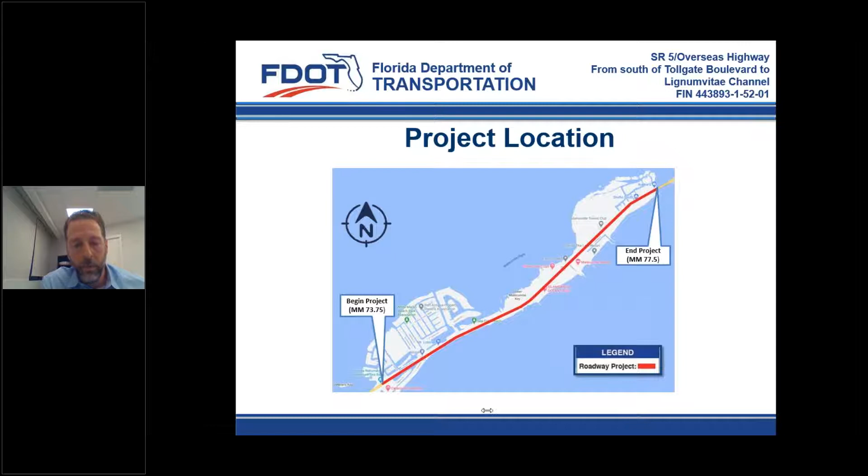Good evening, everyone, and thank you for joining us. As Paulette mentioned, the project limits are from just south of Tollgate Boulevard, which is approximately mile marker 73.75, to mile marker 77.5, just at the Lignumvitae Channel Bridge. Next slide. This is what's categorized as a 3R project, which stands for resurfacing, restoration, and rehabilitation of the corridor. And the purpose of this project is to extend the life of the roadway, as well as to address any safety issues along the corridor. The project lies within the village of Islamorada, within Monroe County.

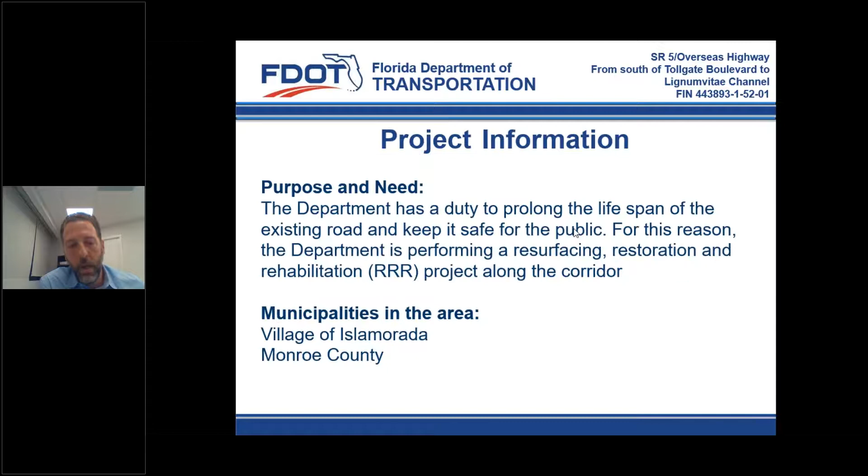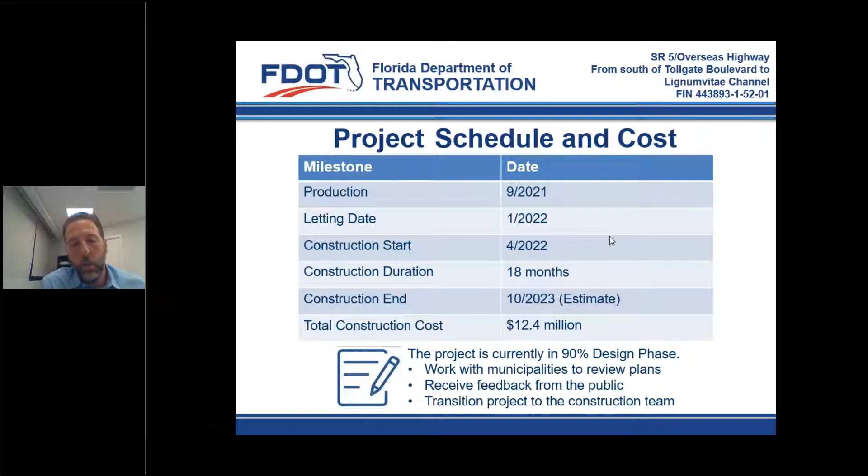Next slide. We are currently in the 90% design phase of the project. We're expected to finish the design in September of 2021 with an anticipated letting date of January 2022. At this time, the construction is estimated to start in April of 2022 or sometime in the spring. And its expected duration is approximately 18 months with an end date of October 2023. And this is estimated as well at this time. Right now, the project cost is approximately $12.4 million. Next slide.

Now, a quick overview of the scope. The intent of this project is to repave and restripe both the travel lanes along the corridor as well as the shoulders. We will also be raising the roadway and shoulders from approximately mile marker 73.9 to approximately mile marker 76 to address sea level rise. We will also be improving the drainage along the segment. I'm sure most of you have seen the ongoing construction adjacent to Sea Oats Beach, which is reconfiguring the revetment system. As a result of raising the roadway, we will also be tying into that new system that's being constructed now. We will also be upgrading the signing and the pavement markings along the segment and upgrading bicycle features along selected locations of the shared use path, specifically the crossing locations. In addition, we will be providing audible and vibratory pavement markings along the edge lines and center lines of the roadway. Next slide.

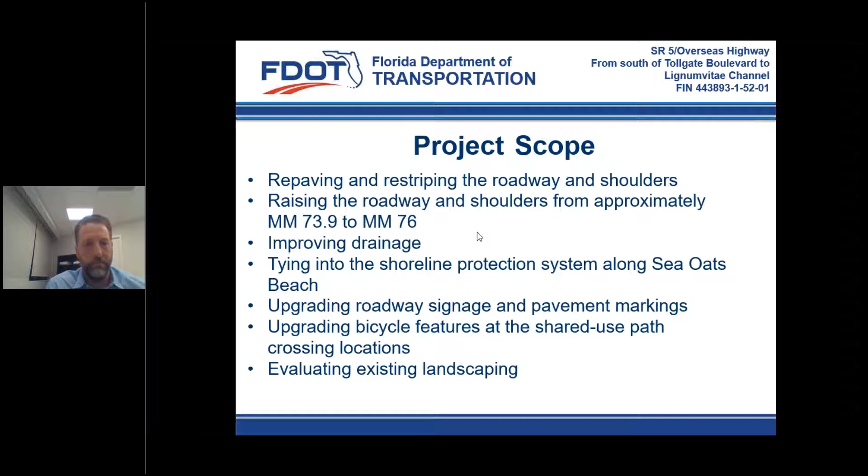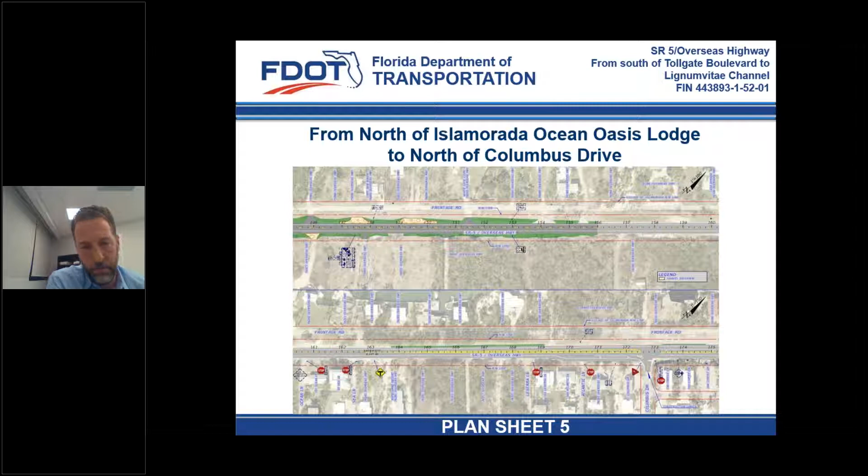And then as you can see here, where the color of the pavement changes to a lighter color, this is essentially the location where we're going to be transitioning down to match existing. And from this point forward, the intent is strictly to mill and resurface the existing pavement, matching the existing elevations. Next slide.

Now, what to expect during construction? The goal here is to maintain the existing travel lanes during construction during the daytime. So we will always have one lane in each direction during daytime. We will need to provide temporary lane closures in order to build the project, specifically as it relates to paving the corridor, but that will be restricted to nighttime work from 9:30 p.m. to 5 a.m., and we will be doing that with flagging operations.

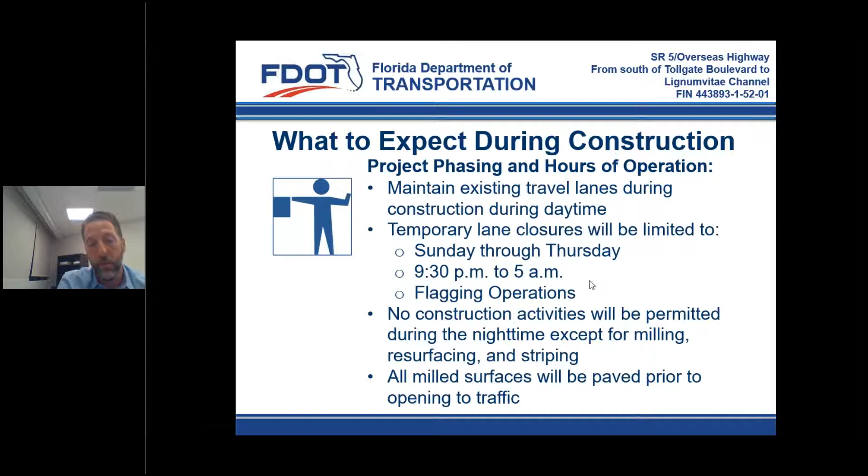That would be the only construction activity permitted at night, in addition to striping of the corridor. And given that this is a high-speed facility, we will also ensure that all milled surfaces are paved prior to opening to traffic the next day. Now, the existing posted speed for the majority of the segment is 55 miles per hour, and that will remain. I do want to point out that at nighttime, given the flagging operations, operating speeds will obviously be reduced.

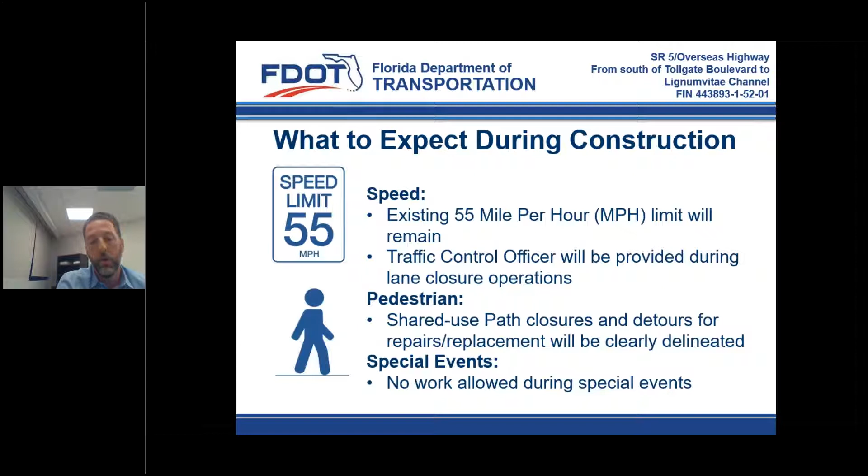As far as pedestrians and cyclists are concerned, any shared use path closures will be provided with temporary detours to ensure connectivity and continuity during construction for pedestrians and cyclists. And we understand how important special events are in the Florida Keys, so we will ensure that no work is allowed during any special events.

Now, dust, noise, and access are obviously things that we need to consider during construction. Our plans will ensure that the contractor is required to water and sweep after each workday in order to minimize any construction-related dust. Noise abatement is also important. That's why we're going to be limiting the work at night to milling and resurfacing only, to try to limit any noise disturbance at night. And as far as access, per standard specifications, business and property access will be maintained at all times during construction.

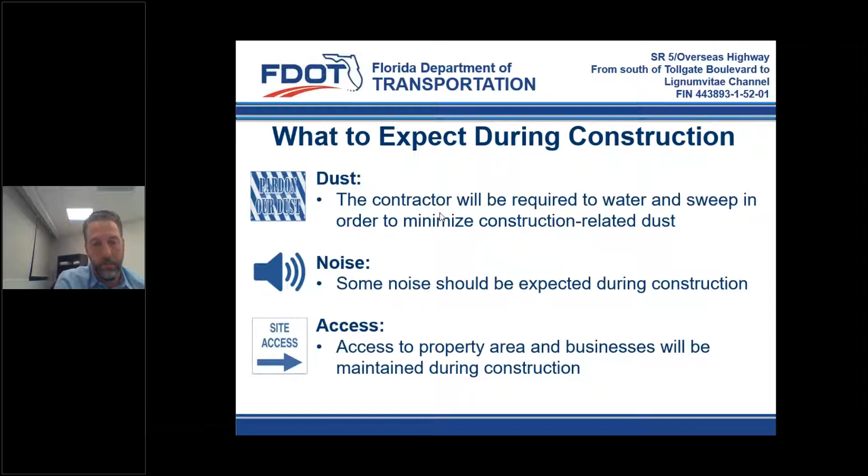And that concludes the presentation, and I will hand it over to Paulette now. Thank you so much, Fabio. Now we've reached the question and answer portion of our presentation tonight. We ask that you please submit your comments in the question box. After addressing comments in the question box, we will open the microphones. If we're unable to answer your question, the project team will provide a written response after the meeting, so no need to worry about that.

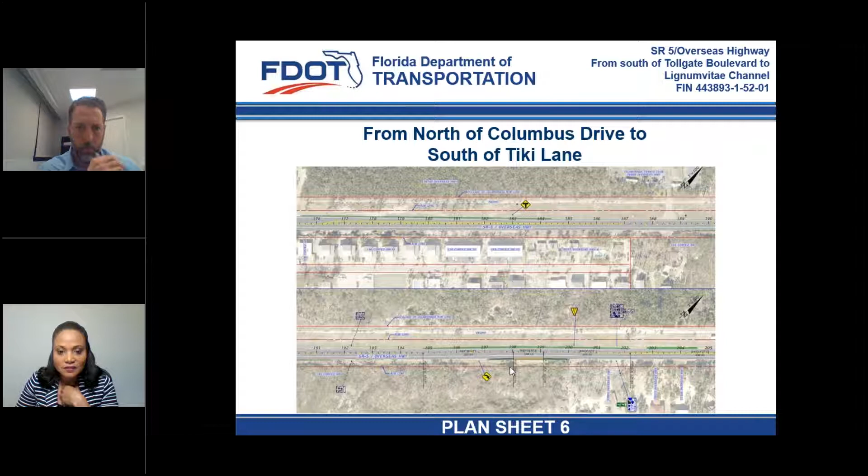Yes, we've had a bit of a dialogue on part of my question. I have a 2-part question. I know you showed a slide on it, but I didn't pick everything up. Can you elaborate on how the drainage is going to work in the area around mile marker 75? And secondly, where you're raising the highway, how is access to the access roads and homes going to work? Because 2 feet is a lot in those spaces. Are you building a ramp or something? You touched on it, but I didn't follow the explanation.

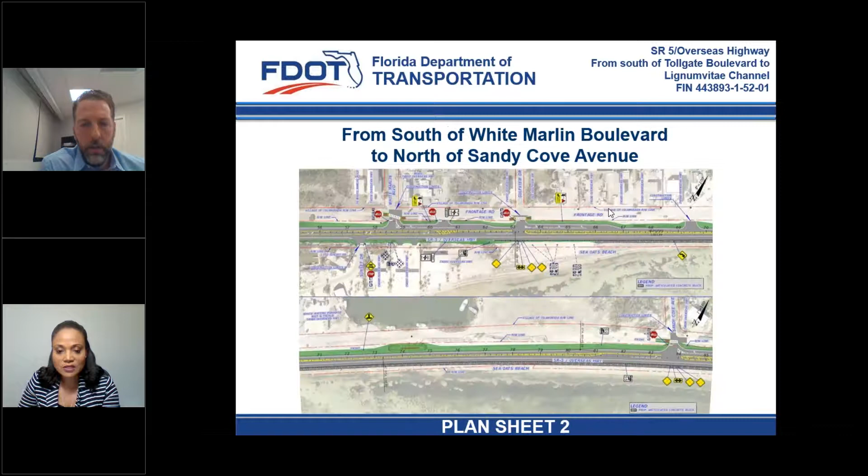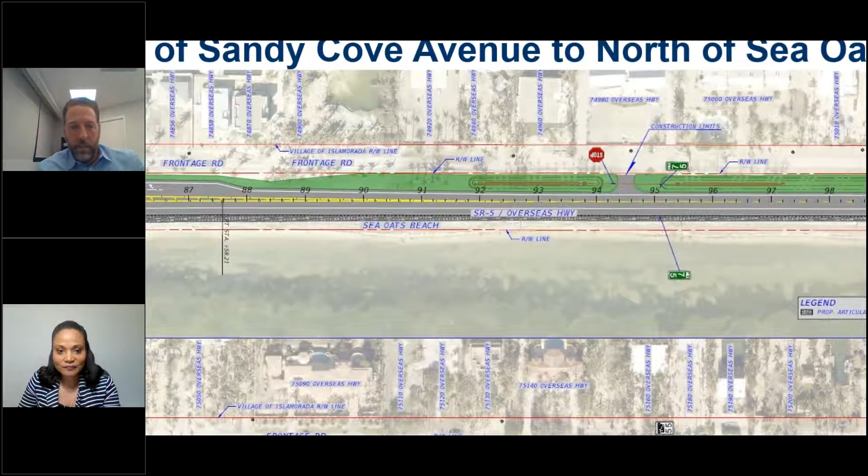Okay, absolutely. I'm going to have Fabio answer that question for you. Paulette, can you take us to that section? Which one of your plan sheets is it, Fabio? Keep going to the next one. No, go back. Back. It's right there. It's actually the bottom pane. Oh, the bottom one. Okay.

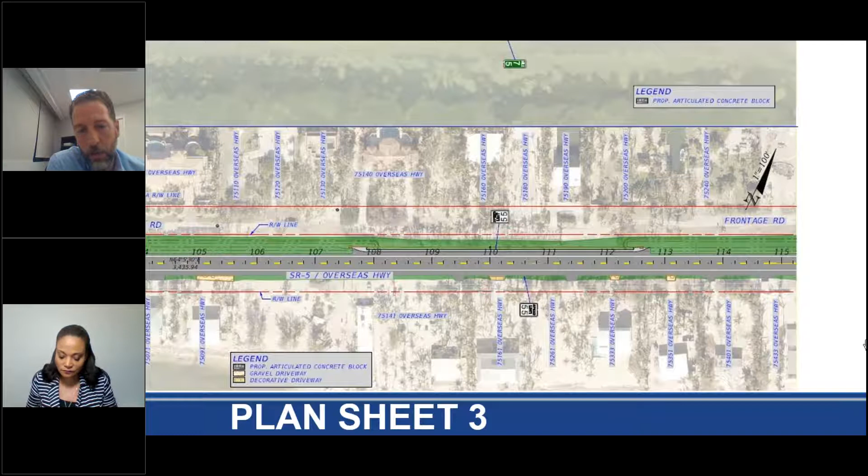Okay, perfect. So in this location specifically, we understand that the frontage road is flooding during king tide. As part of this project, in this specific area, between station 108 and station 113 roughly, we have very limited swale area. So we're providing a shoulder gutter in order to capture all the runoff from the FDOT right-of-way and discharge that into exfiltration trenches within the swale areas.

This is obviously going to improve the current condition, because right now everything is sheet flowing and running off into the frontage road and into that green area. To capture the runoff from the FDOT roadway, we're now collecting it along a gutter in that specific location and sending it to exfiltration trenches. I'm just going to interrupt with one question. Can you explain what an exfiltration trench is? It's basically an underground piping system with rocks, which allows the water to percolate into the existing ground.

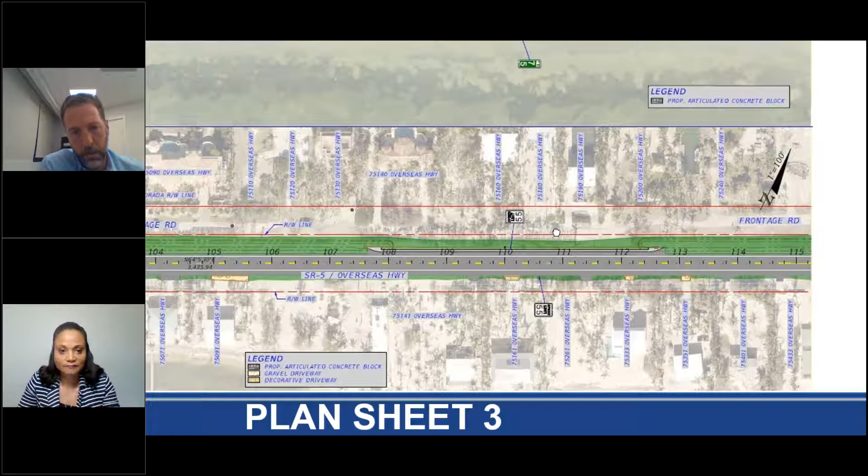Okay, thank you. So there will be some sort of an improvement, but I do want to point out that the flooding experience along the frontage road will still be there after the construction of this project. Okay, thank you. And I will try to follow up with the village on that. I wanted to wait until after I heard your explanation.

And then the second part is, if my memory is correct, the highway is going to be elevated about 2 feet from where it is right now in this area? In this area, we're looking more at about 1.5 feet. And then we're going to be touching down with like 1 to 6 to 1 to 4 roadside slopes, which average about 5 feet from the existing edge of pavement. Okay, so 1 to 6 to 1 to 4 is the ratio of height to length? Correct. Okay, great. Thank you. That explains both things. Thank you very much. You're very welcome.

Okay, thank you so much. I really do appreciate that. Let's see if we can get Mr. Mark Gregg. I believe he has a question. Mr. Gregg? Yes, I also typed in some questions.

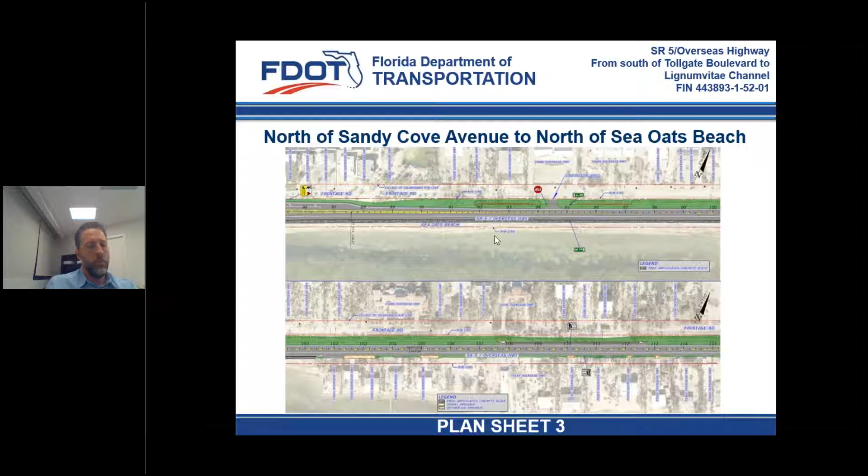I'm very concerned about the turtle nesting area, not only with your proposed project, but with the current project. That is a historic turtle nesting area that was damaged by Hurricane Irma. I'm not sure how much nesting area is left there, but can you share some information or some insight on what can be done to not only protect turtles there, but to hopefully restore the nesting area that may be impacted by your work?

We're currently in the process of going through environmental permitting with South Florida Water Management and U.S. Fish and Wildlife. Based on our initial conversations, one of the things we're looking at, through coordination with the village of Islamorada, is adding a guardrail. We understand that the village is currently utilizing silt fences to try to keep turtles from crossing the road. So by us adding a guardrail, it may provide the village an opportunity in the future to go with a more permanent feature than the current silt fence.

But right now, as I mentioned, the project is under design, and we are currently coordinating with Fish and Wildlife and South Florida Water Management District. What, if anything, is being done to protect turtles from entering the highway for the upcoming nesting season, which is going to begin next month? As far as what's happening next month, I'm not really sure. I know the village in the past has been providing silt fences. I'm not sure if that's what they're going to be doing now or not. Unfortunately, I don't have more information on that.

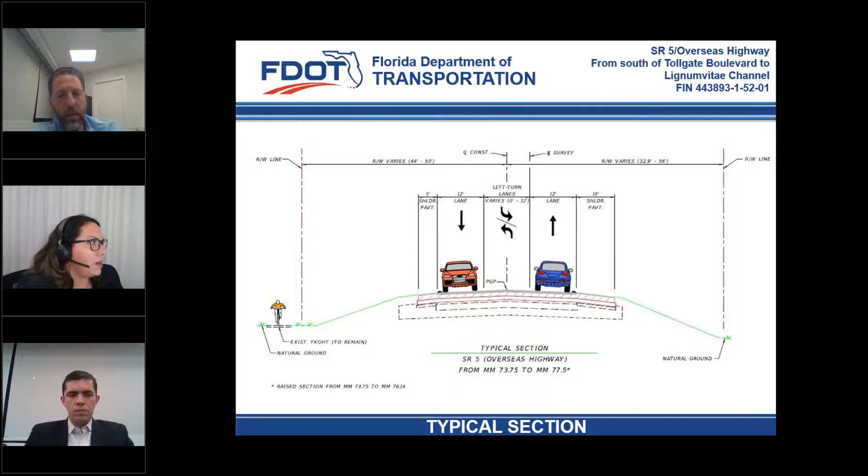Next. No, there. Yeah.

Like Fabio said, what's shown here in brown is what's being built by the current project, which does go below the current mean high water line. But our proposed project is basically going to be tying into that. So the upcoming project that will raise the road is going to have less impacts on that seawall beach side, because most of the big excavation for the toe is going to be built by the time we come in, and we're tying in at the top of the berm. So it's a little bit different.

The design that you show doesn't really, from my perspective, allow much space for a turtle to crawl out and lay eggs. In fact, it pretty much prevents that, and so do the open cell concrete tiles or blocks that you're putting there. In other words, before Irma, there was plenty of room for turtles to lay eggs there, and sometimes they even hatched and crawled under the highway. But now it looks like a total barrier. So it appears that we've completely lost the turtle nesting area. What am I missing?

Well, sir, again, I don't want to speak for the ongoing project. But all of this is being coordinated with the U.S. Army Corps of Engineers, with the Marine Sanctuary, with South Florida Water Management District, and the necessary precautions are being put in place. And the permits that have been issued and the permits that will be issued will have conditions with regards to the turtles' protection.

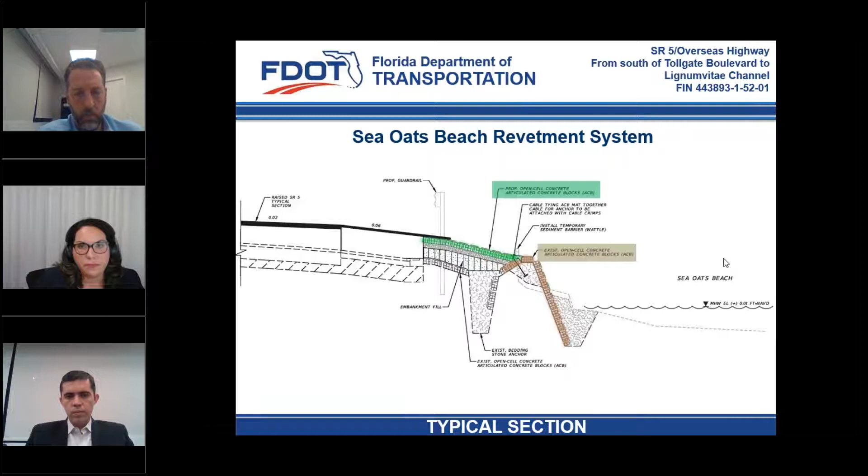You don't have to agree or disagree. I understand. I'm just making a comment. I see you smiling. It's okay. But turtles are very important in the Keys, as they are everywhere. But this project doesn't appear to address that.

Thank you. Yes, sir. Okay. Thank you. Thank you so much for your comment, Mr. Gregg. We really do appreciate it. I would like to make a quick comment. Okay, sure, Umberto, go ahead.

As our team explained, we do not really have knowledge of the current construction project. That was a result of Irma, which affected the road immensely there. So the funding for Irma came and had to be used to restore not only that area, but all along the beach, along the ocean side. And so that's why this project is coming before ours. So we don't really have any involvement in that restoration project. We will find out. They went through all the necessary permits to build this protection.

But also, I just want to bring to the table that there is another plan and another project for the U.S. Corps of Engineers to do beach restoration there, because basically the truth is that the beach there has eroded, basically disappeared. Not only because of what DOT is building now to protect the shore and the road, but also because the beach has been eroding and there is basically no beach there now.

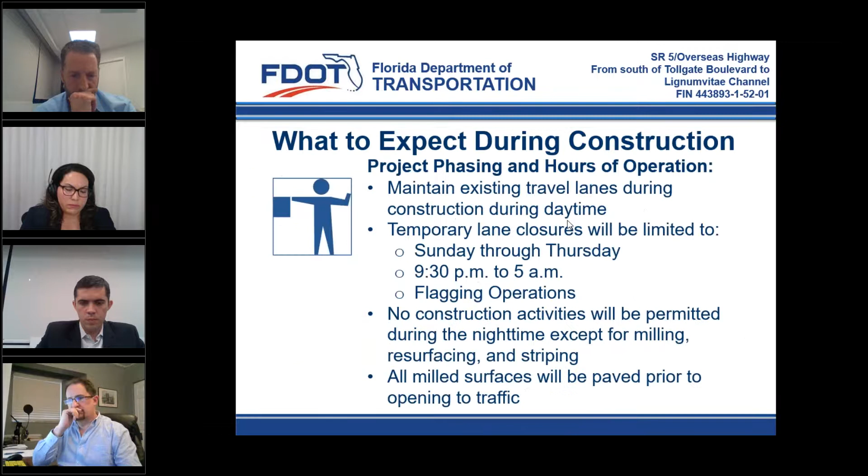We also have a concern. We're homeowners on mile marker 74.5 Bayside. And at the moment, all of the storm water from US 1 is sheet flowing into the access road that's owned by the village.

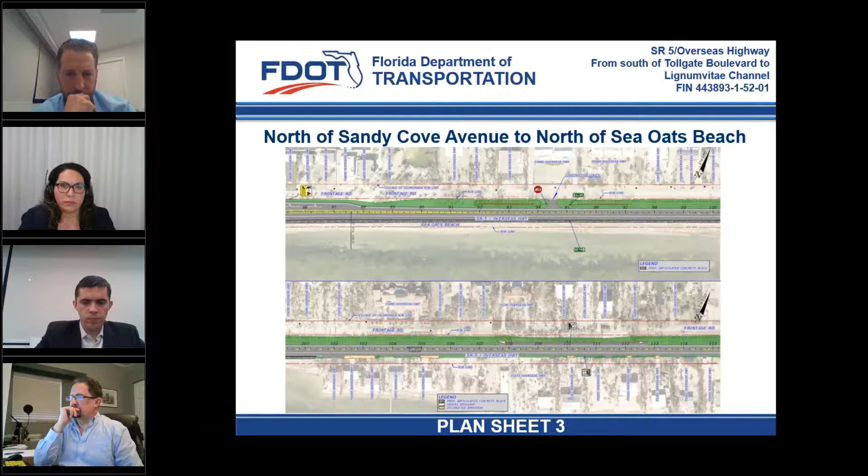And it's creating an unsafe condition in various parts of the access road that's pretty significantly impacting the enjoyment of our property. And I'd like to know if this project is going to mitigate that condition and effectively provide for storm drainage and storm waters that sheet flow off of US 1.

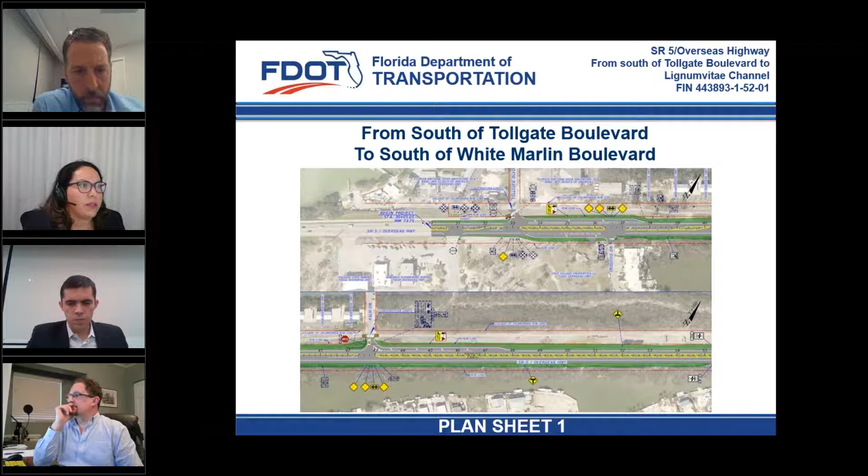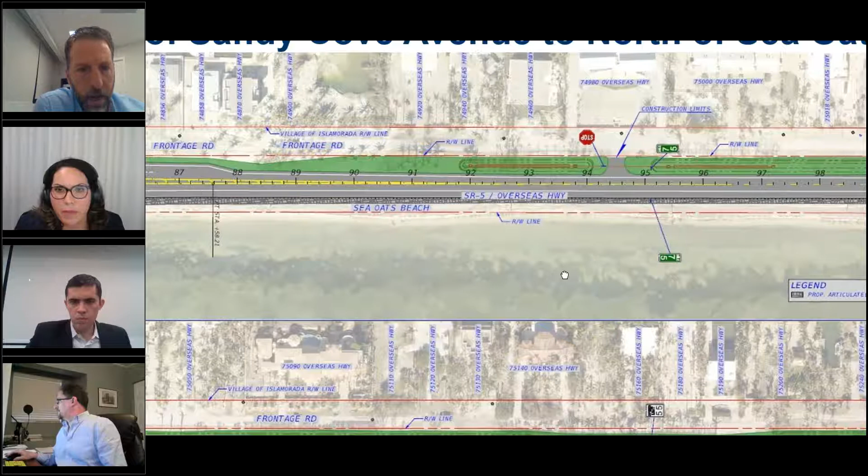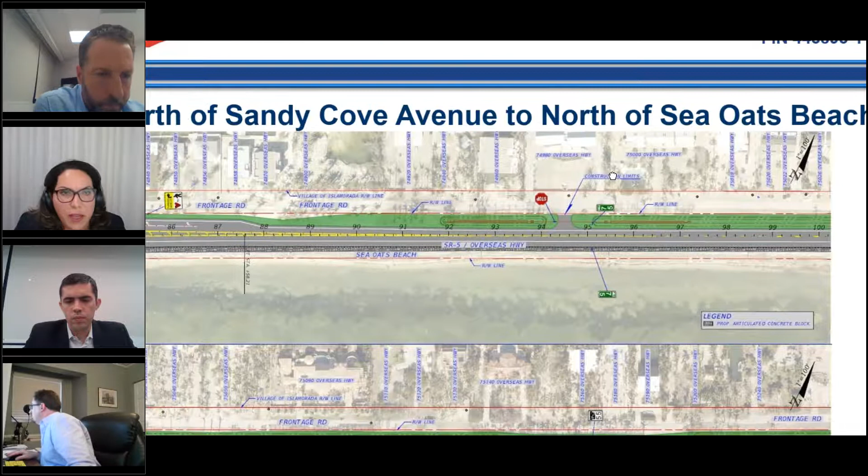Aline, you want to take that one? Yeah, I believe 74.5 is just south of that area we were talking about before. Paulette, can you go to sheet number 3? Is this about the area, the bottom pane? Oh, actually, no, you were at the top. I'm sorry. I think 74.5 is around here. Okay. So in this area, sir.

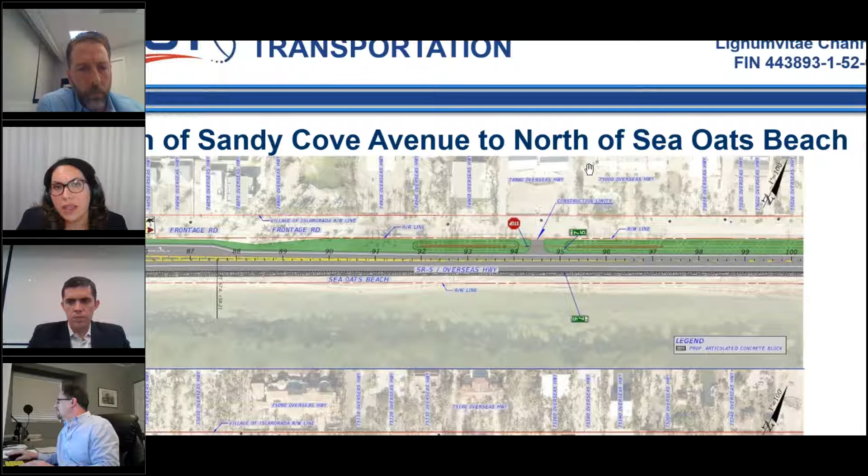So in this area, as you mentioned, the current runoff just sheet flows off of the highway and into a very shallow shared swale with the frontage road, which is within the village's right of way. So what we're doing to mitigate the issue is we're adding swales. I don't know if you see there within the green area, there are contours. We're adding swales that are gonna collect the runoff off of the roadway and attenuate the runoff from the roadway in the swales.

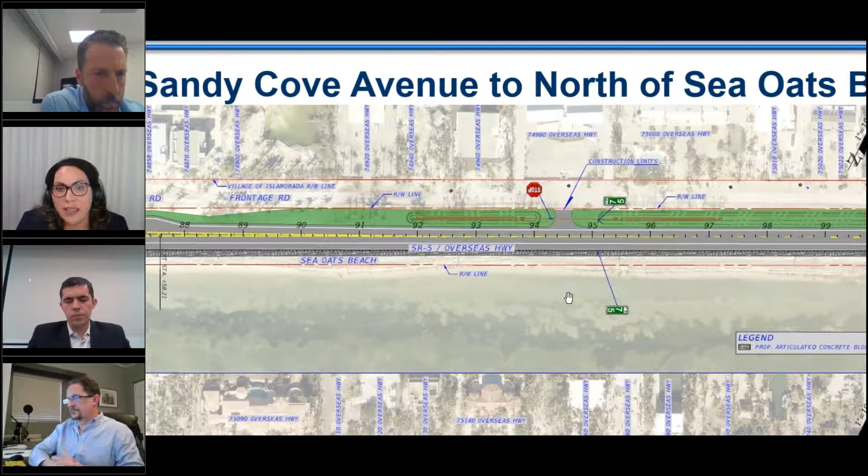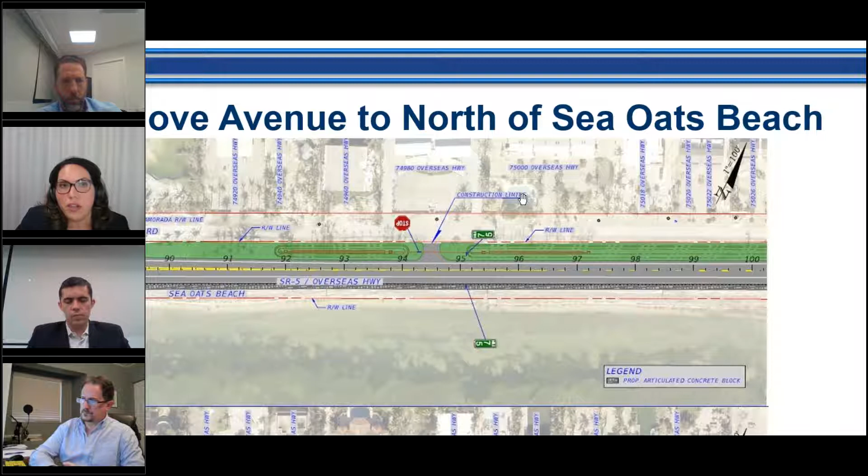And then the swales are gonna have French drains, which is basically just a trench in the ground with a coarse aggregate material and perforated pipe that allows seepage of that water into the ground, so that the runoff is not going into the frontage road right of way property. So this is gonna eliminate the DOT State Road 5 runoff from going into the frontage road.

But I do want to point out that in this area, the frontage road is very, very low. So during times of king tide or wet season, because the water table is increasing and is affected by the increase in sea levels, you may see standing water that is not necessarily from runoff, but is what we call sunny day flooding, which is water that could be coming out of the ground. Understood.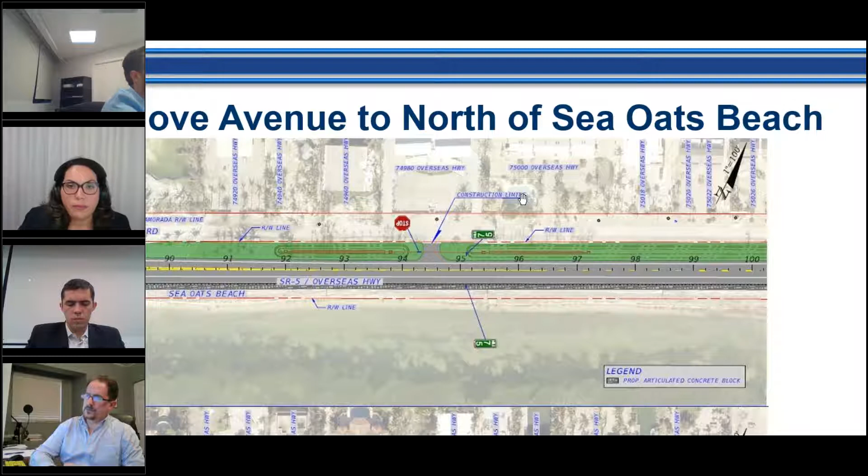Thank you so much, Eileen. Thank you very much. You're most welcome.

Let's see if we have any other questions at this time. Mr. Moser, you have your hand up again. He may not be able to speak, so I'm going to go ahead. Team, we had that question for Mr. Moser having to do with the signage. He does have another question. Evaluating existing landscaping: is any landscaping possible, please, between Sea Oats Beach across from the gas station and the beginning of the Calusa Cove, specifically near Sunset Drive and Iroquois Drive? Thank you.

Yes, unfortunately, since this is a resurfacing project, landscaping cannot be incorporated as part of this project. That's something that would have to be done in the future as part of another project. While we are evaluating landscaping from a safety standpoint to ensure that there's no trees within lateral offset, any new plantings we will not be implementing as part of this project.

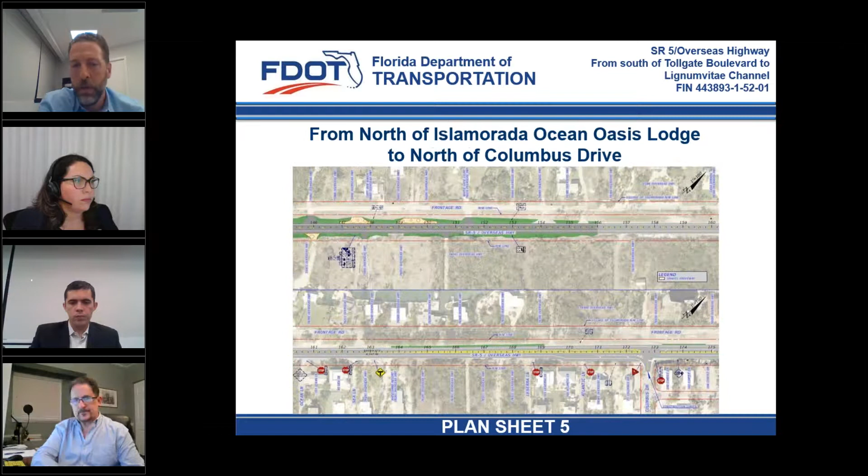Okay, the raising of the roadway is going to stop at approximately mile marker 76. So the area near Robbie's, which is approximately mile marker 77, 77.5, we will not be raising the roadway in that section. The raising of the roadway will stop at mile marker 76, approximately. We will be improving the frontage road at Robbie's. We're going to be widening to improve access to that frontage road, specifically the right turn access from State Road 5 into the access road to Robbie's. So we will be doing that work, but we're going to be matching existing elevations along that segment.

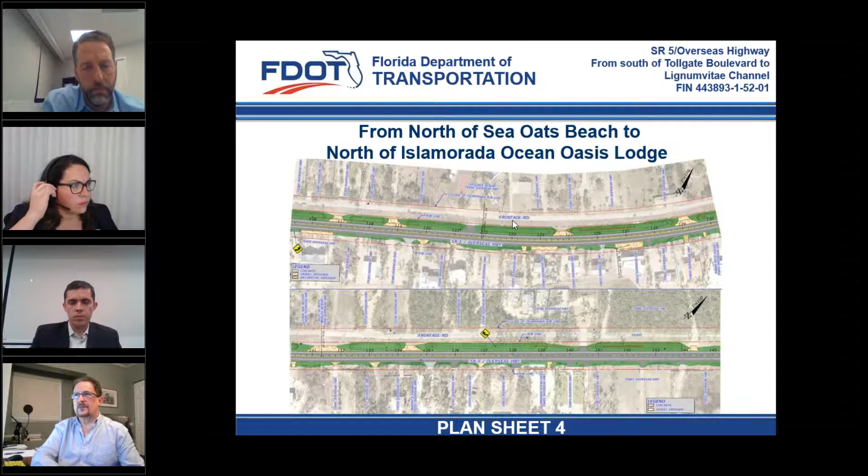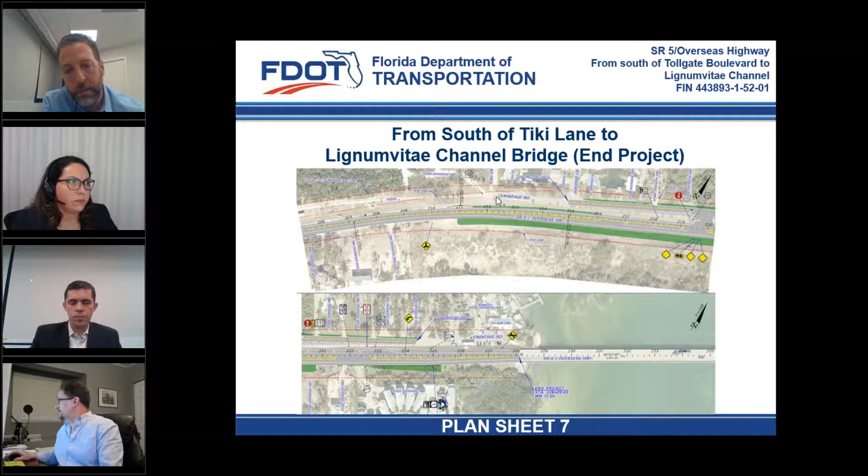Thank you, Fabio. Keep going to the last plan sheet. Keep going, okay. This one? Yes, correct. Okay, all right. So there we will be matching the existing elevation. So we will strictly be limited to milling and resurfacing there and the access improvements to the frontage road.

Okay, thank you, Fabio. Mr. Joe Roth has a question. He says, will the project necessitate moving utilities? We would definitely require adjustments to utilities as a result of raising the roadway. So any existing manholes, valves along the segment will have to be adjusted to meet the proposed grade elevations in the future. As far as relocation of utilities, at this time, we don't anticipate any.

We do understand that Florida Keys Electric is in the process of potentially relocating their utility poles along Sea Oats Beach to the west side of the corridor. But that's a project that currently has not been funded, last we spoke with FKEC, but it's something that is potentially in the works. It will not be part of this project, but there is a potential for relocation of those utility poles in the future. But as far as this project is concerned, it's going to be limited to utility adjustments of manholes, valves, etc.

Thank you, Fabio. Paulette, yes. I don't know if it was Mr. Roth that had the question that you read regarding the base flood elevation. I just wanted to elaborate on that. What I had answered before with regards to the raising of the road is to combat against sea level rise, which is just the everyday expected tidal fluctuation in sea level. With regards to base flood elevation, that's typically for the 100-year flood events for FEMA. And I don't know if the gentleman was referring to that.

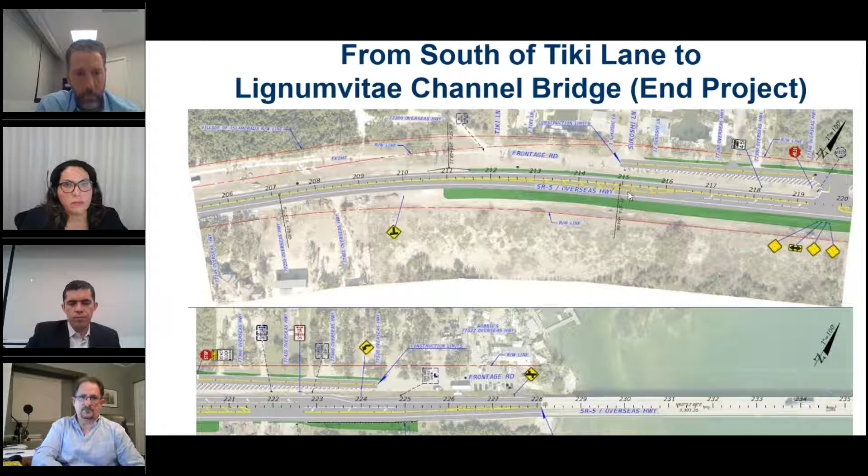Yeah, you did answer part of the question. I just want to thank Mr. Gregg and Ms. Williams for their comments about the turtles, number one, because we live at 74.5, and that is a concern from almost all the residents. My specific question was about the walking bicycling path between Robbie's and Sea Oats Beach, not so much towards Robbie's because that's fairly dry, but another caller mentioned the village access road is a low spot, floods often, and it does not appear to be a rising sea level thing, but whenever it rains, that water will get ankle deep or a little bit deeper, and it will go almost to the edge of the highway.

So if you're walking on that path, sometimes for 7 to 10 days after a heavy rainfall, you have to go out and walk on the edge of Highway 5, US 1, and it's an accident waiting to happen, and I don't feel good doing it, but you know, that is my exercise for the day. So I'm wondering if this project isn't an opportunity, even though it's not in the designs now, and I'm not so sure.

I've done a lot of work like this in my career. I'm retired now, but deepening and widening the swales will certainly help, and some French drains will help. But I can guarantee you right now that will not completely, not even come close to addressing the problem. And I'm wondering if there isn't an opportunity for this project to address some of those concerns, even if they have to work with the village to address, because it is their right of way, their roadway, and the walking path.

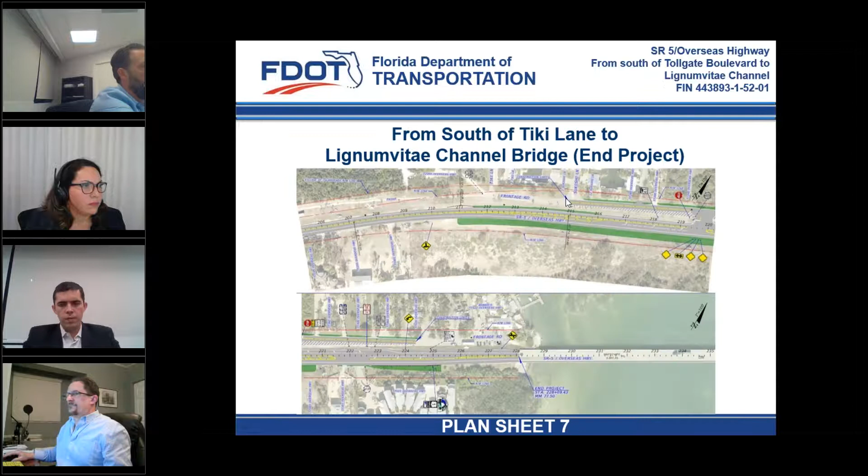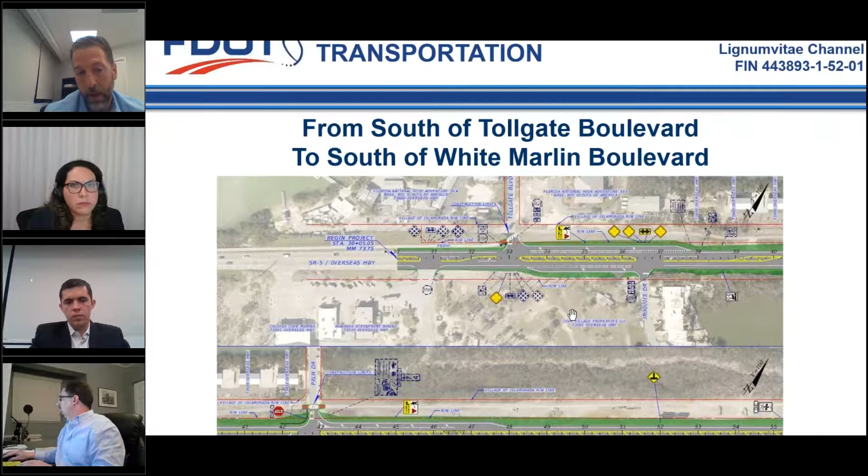Yeah, that location there, as you can see, we have very, very limited room. Right now there are no swales that we're proposing along this segment. We do have minor green areas that we're going to be utilizing to capture the runoff, but we have very limited room within the right-of-way to provide swales. And in some sections, the Florida Keys Overseas Heritage Trail is almost directly adjacent to the shoulder. In that specific area, we're not really raising the roadway. That's where we're essentially transitioning down to tie back to existing, so we're almost replicating what's currently out there.

We can go ahead and further evaluate the drainage at that location to see if there's anything we could do. But as you can see, we have very limited room there based on the existing conditions. The only thing I can tell you is we're trying to match what's out there currently, and we're strictly limiting what we're doing there to milling and resurfacing and transitioning up to the raising of the roadway.

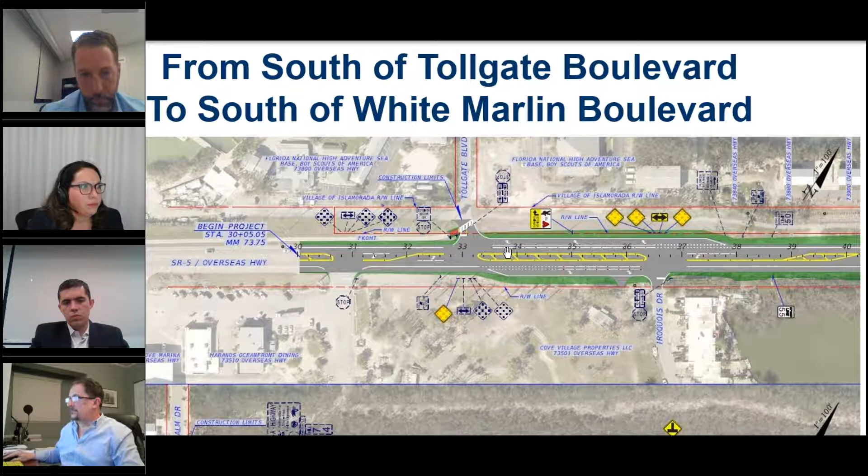Yes, thank you. And when I asked about landscaping in addition to beautification, I was hoping it was something that would suck up all of the additional runoff and help mitigate against the impacts on the wetlands along that canal area, again in sheet 1. But we've gone back and forth on an email with that. So thank you very much.

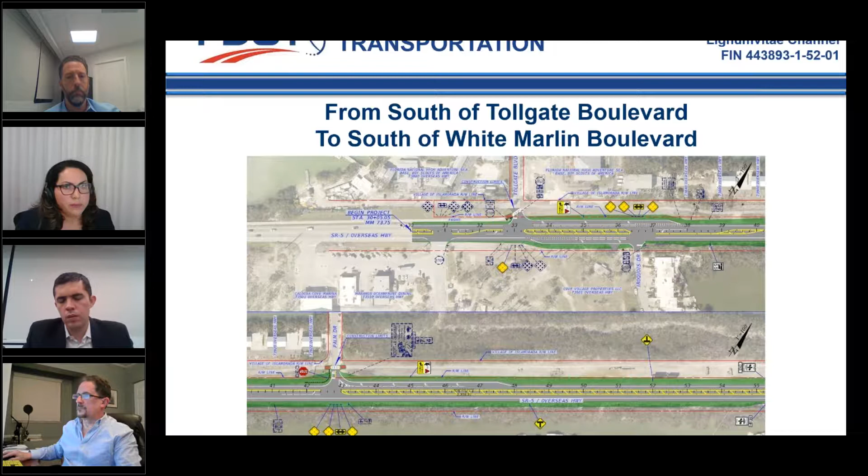Thank you. Am I correct that there are no swales of that design anywhere along this stretch currently? So within the stretch that is showing up on the screen, is that what you're asking about? The entire project stretch, are there any improved, for lack of a better term, swales that have French drains currently anywhere along the section of US 1 where the work is going to be done?

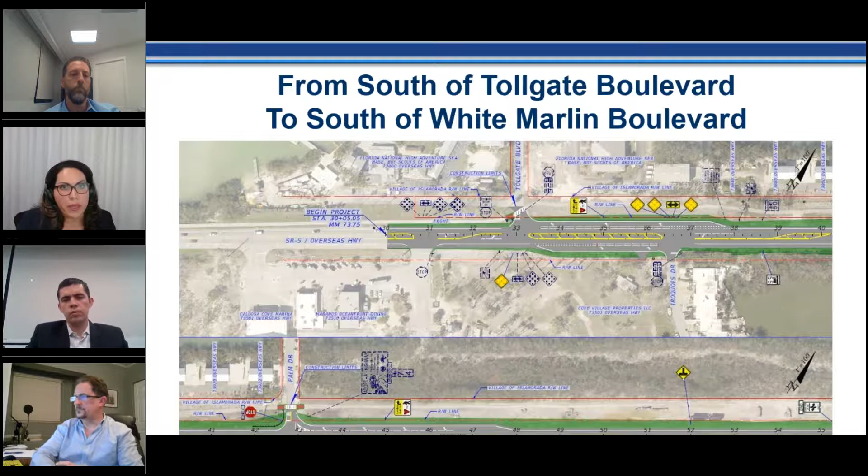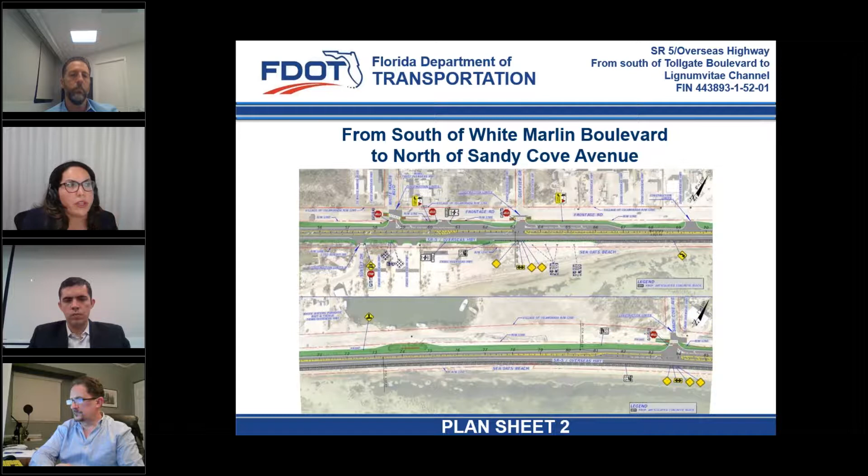Yeah, so we have introduced swales within sections of the road that are being raised, and I want to say, Paulette, they start mostly from just north of mile marker 74 to mile marker 76, Fabio. I want to say 70. Give me 1 minute. That's correct. It's mile marker 76.1 approximately.

Yeah. My question is, though, the way that everything exists today, am I correct in saying there are no swales that have those kinds of French drains and improvements currently? No, sir. Currently no. We did a record search of all the previous projects that have come through here, and the only thing we found is that in the past, trenches had been dug up.

So basically a 4-foot deep trench, on some of the swales, not everywhere, like a 4x4 trench had been dug up in the past and filled with a coarse aggregate that would allow for more percolation of the water, but there were no swales per se shaped to collect and retain that runoff.

So this project will be providing that improvement where we are collecting the runoff from the roadway in the future condition. Yeah. I know you have to be very careful not to misrepresent what this will accomplish, but to a layman, any addition of these, what I'll term as an improved swale with the French drains in it, is going to make a significant difference, because I don't believe there's anything like that now.

And these problems don't come from 25-year rains. They come from the thunderstorm that's going to come 2 weeks from now. And again, there is an issue with the lot elevations all along that stretch on both sides, where the residences are actually lower in elevation than even the right of way that the village has control over.

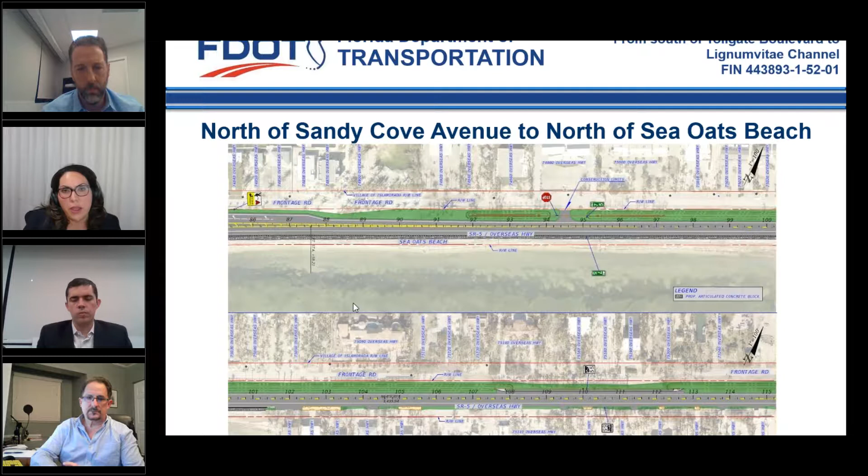Yeah, so Fabio. Go ahead. Yeah, so with the raising of the road, obviously FDOT is also trying to protect the infrastructure. That is why the articulated block is being put back by the ongoing project, and that is why there is an additional articulated concrete block that will be put in based on the details that we had shown you before. I think it's page 14, Paulette, of the presentation.

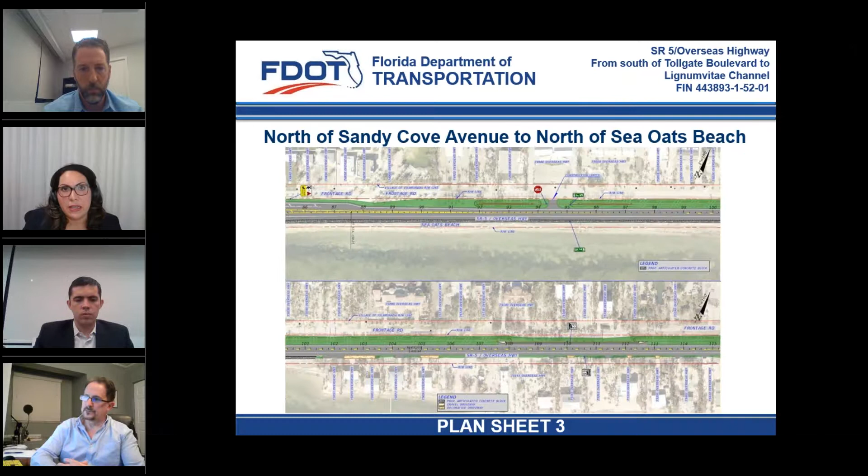In here, unfortunately, most of the entire island is basically below the base flood elevation for a still water condition on the Atlantic side, which is, I think, the projected 100-year storm. I actually have them. Give me 1 minute, I can pull them up. I looked at the 10-year, like you said, the 3-year storms, the typical storms that you would get more frequently, all the way to the more strenuous events. And basically what we're seeing is that most of the island is at or below those projected base flood elevations without accounting for the effects of tidal. So those are basically just still water.

So one of the reasons why that articulated block is being put in is so that when the water does rise and it may get above the roadway, it doesn't wash out when the water recedes and the tide is beating on it. I think we saw some of that happen during Irma, where there were some sections of the road that were not necessarily protected, and there were sections of the road that eroded. So there were some things that were put in place here to hopefully prevent that from happening again.

I believe right now the scope is not, we can't really necessarily raise the road above the base flood elevations, because that would be disproportionate in comparison to the adjacent properties. But we are putting measures in place to protect the infrastructure so that it doesn't wash out if there's an extreme storm event. I don't know if that answers your question. Yes, thank you very much.